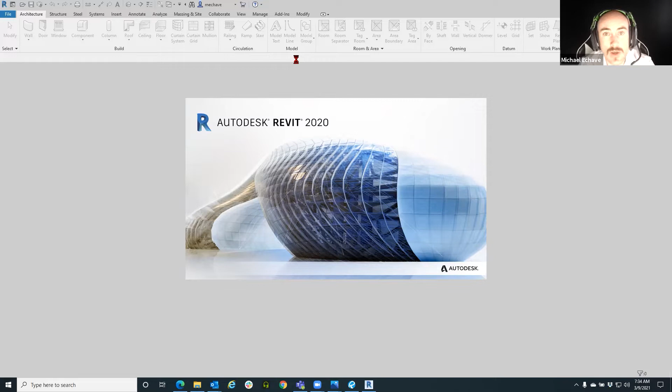Add-ins are great for batch printing. You also have the ability, for those of us in the architectural realm that use rooms, to export your rooms out as spaces, which helps with punch list walkthroughs so you can itemize punch lists through specific spaces. And also you have the ability to create a 3D PDF. I'll show you that in a second.

Let's see what else we have. Looks like we have a question, and I don't know if it just got cut off. It says, I have a question about Vu. Maybe they're going to come back with the rest of that question.

Morning, having issues creating 3D PDFs from Revit, the pipe fitting valves disappear. Is there a setting that I need to adjust?

That is a great question, I would defer that over to our support. I don't know why there would be an issue of disappearing elements unless you're not having them also selected in the 3D model tree. So for those of us that have never seen a 3D PDF, this is something you can create if you have Bluebeam Revu CAD or eXtreme, which allows you to have the plugin capabilities to your software. For instance, Revit is a design software that has the plugin capabilities, and you can create a 3D PDF from that.

So let me open up a 3D PDF for those of us that have never seen one before. I'll go to my documents here, and I have a 3D PDF here. It's going to take a second to load, because it's pulling all of the information from the Revit model as well. As it loads - for those of us who also have a question like, does this work on your iPad - unfortunately, 3D PDFs do not, but it does work if you're using something Windows-based. As I'm going through here, I can spin around my 3D PDF.

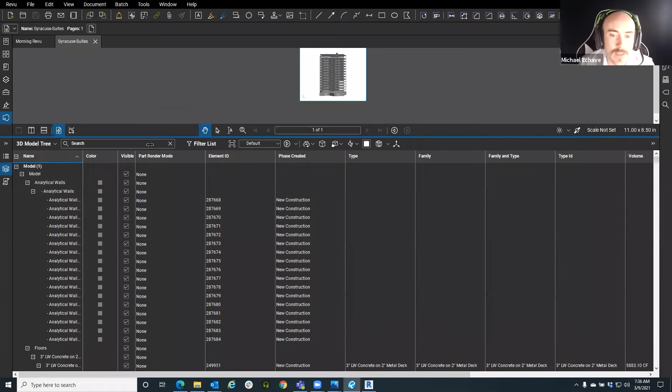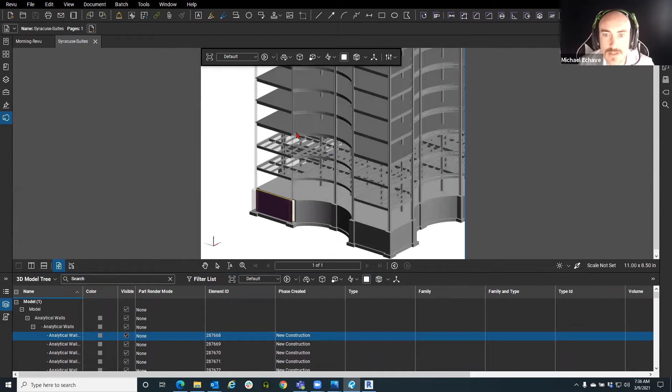You have this thing down here at the bottom where you usually have your markups list, it's called the 3D model tree. This actually pulls all of the data from your Revit model into this model column list, just like the markups list you have for all of your markups that have been placed. As you go along through here, you can start clicking on specific elements. It'll actually highlight them too in your model, so you can be notified of where it is location-wise. The great thing about this too is as you start clicking through things, it actually reads the data there and hides things so you can visually see something better, just like the floor here.

You can even have the crop section if you wanted to, just like the section box in Revit. So as you go through here, you can pull and push this so you can see the inside of it.

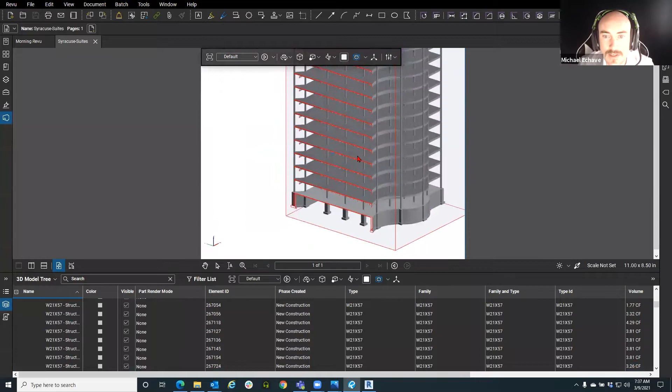Again, it is different when you're trying to navigate through it. As I'm scrolling around the model, it's not the same as Revit, so if you're transitioning between the two, be aware they're not the same orbiting functions.

Michael, I noticed that on the bottom bar, it looked like the Revit parameters. Is that exactly what it is? Correct, yep, all the information for it.

So as I scroll along to the right, I can even see the length, the volume of it, the material that it is. You can use this list and sort out columns if you didn't want that data from it.

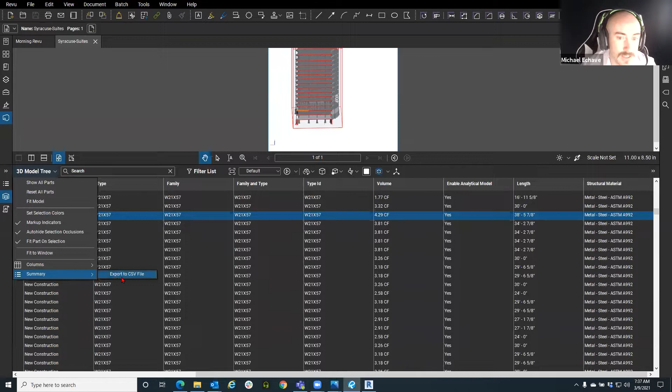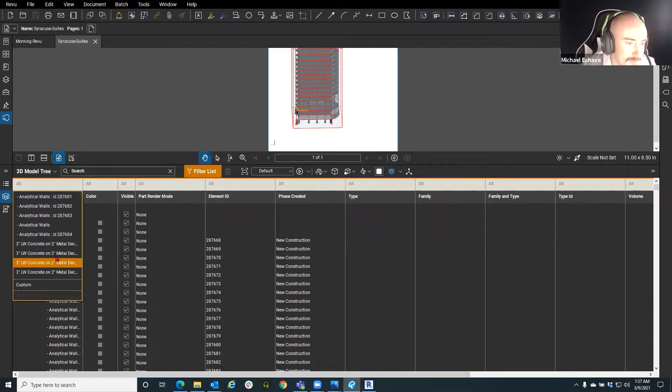You can also create a summary to a CSV file. You can filter these out saying, hey, I only want to see specific ones from - we won't do element ID - maybe we just want to see the 3-inch concrete ones.

So in typical fashion, when something's filtered out in Bluebeam Revu, even markups, everything else gets grayed out. Everything that is filtered will be its prominent color.

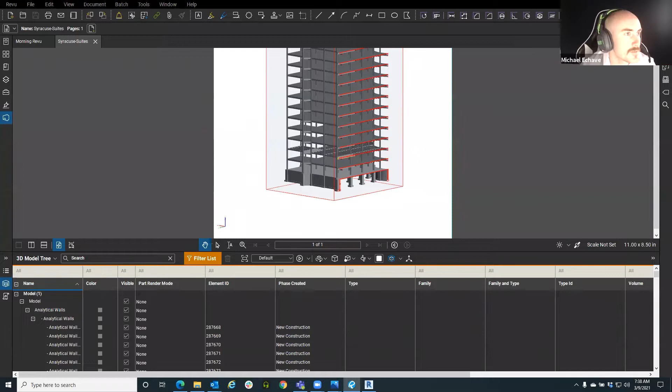Hey, we're really excited to try the studio function of Bluebeam for our enterprise, and I was wondering if there's a way to deploy Vu for non-Revu users in the enterprise right away without going through the trial, so they're not prompted to renew or purchase Revu. We can just have our tech team install Vu for them to use for meeting participation with project managers in the facilities group.

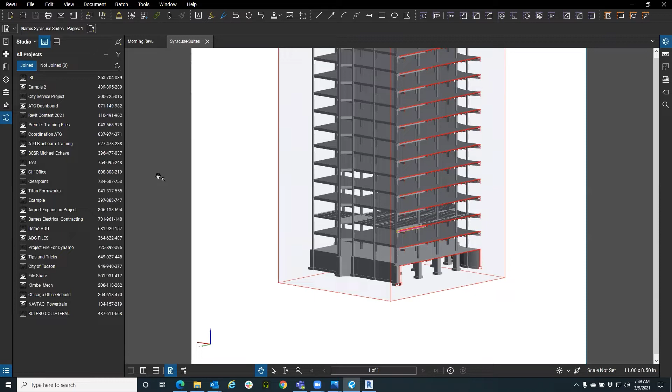Okay, so Edward, you're saying you have some licenses of Revu, you have some PMs going to use the view mode? The PMs all have Revu eXtreme, but we want to collaborate with our end users and associates in the enterprise with our drawings and everything. So it'd be nice if they had View as well to participate in the studio sessions. Okay, so they'll receive an invite if you invite them via email versus sending them the ID.

It'll prompt them to download a free trial, and after that 30 days, it turns into view mode. How do they interact? They'll still have the studio on the left-hand side that they need to gain access to, and they'll just need to log in like I just did.

So they need to create a Bluebeam ID, and then from there they can sign in. Again, right, I'm acting as if I don't have a license because I am the coordinating party.

Sure. I'm just wondering if there's a way to just skip the trial and have it install in view mode right away without prompting them to purchase a new license of Revu, because that'd just be a mess for the 5,000 associates in the company.

Yeah, let me write that down. I know there's a way to deploy an actual license of Revu as view mode only. Okay, that's what I'm curious about - if the free version does that. Yeah, I'm wondering, skip the trial and just do that. That makes sense, okay.

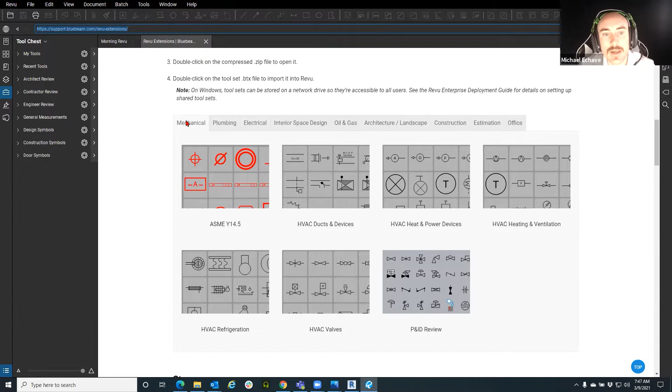So from here, you can also see my URL extension, I also put it in the chat. As you start going down, you can see there are already some created tool sets you're allowed to download for free from Bluebeam Revu's website. There's mechanical, plumbing, electrical, interior space design, and architectural is one that you mentioned. There isn't really one laid out for structural. If there's any structural specific ones you'd like us to create, we can create them for you, or again, we can help teach you how these work.

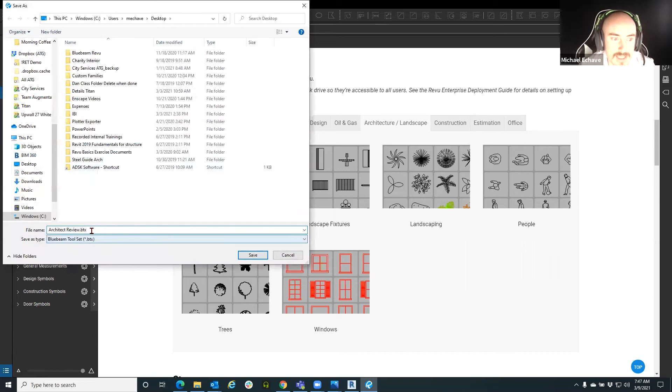For those of us that didn't know, you can export your tool sets out. Just go to the gear symbol, you can export, and they save out as .btx files. They can be shared with you, you can email them. All you have to do is double click them and they populate into your tool chest.

And if not, then you have to go to your drop down, manage tools, and import them from here. Be aware, profiles play an important role in what tool sets display from your tool chest.

For those of us that didn't know, Bluebeam Revu works off a thing called profile. That's what controls your user interface. I talked a little bit about it last time, but if you go up to Revu at the top here, go to Profiles, and these are your profiles from out of the box - actually these top three. This controls the way the UI looks, where your tool menu and toolbars are, your panel access, and it also plays into effect with your custom columns in your markups list, and also what's displaying here for your tool sets.

Looks like Kyle Davis has jumped in and started answering some of these via text. That's more the tech support stuff.

We have another question here, which is kind of related to what you were just talking about, Michael. We have been developing our own tool sets, but want to have a single location to share these tool sets on the network. Is this possible, and how?

Yes, so you're just going to change everyone's default. Manage tool sets from here, you can import them.

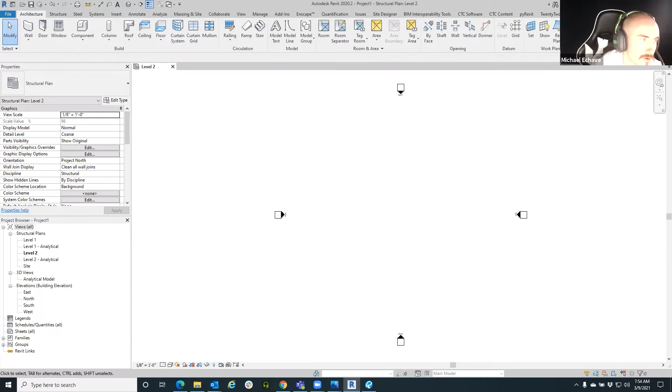David, are you going to be here next week? If you want to shoot that in the chat, because we'll talk about it next week. You aim to be, okay. I'll have the answer for you next week, and if you're not there, I'll email you.

All right, thanks Michael, thank you Matt. I think we have reached the end. Any more questions? These are good questions.

Otherwise, we started at the very beginning with sessions. Would now be a good time to give a high-level overview of sessions? Yeah, we'll start with sessions again.

Again, Studio is free with any version of Revu - that'd be Standard, CAD, or Extreme - and it's on your panel access bar. For those of us in the Legacy, which would be 17 and below, I don't recall exactly where it is.

But in order for you to log into Studio, you have to have a Bluebeam ID, so you're going to create one. I always recommend picking something for your name. As you go through here, sign in, you'll click on the little studio. And if you don't see it on your panel access because you're in a different profile or maybe you've hidden it, you can always right click on a panel area and say show, and then you'll see studio. For all of us that love hotkeys, you can just hit Alt+C.

Again, when you go into here, you're going to sign in. If you haven't created a Bluebeam ID, you need to create one. I always recommend, again, Bluebeam display name professional, because when you print out reports from a studio session, you will see the display name next to whatever the comment or markup that was listed. This also falls under the markups list as well. So then from there, you're going to sign in.

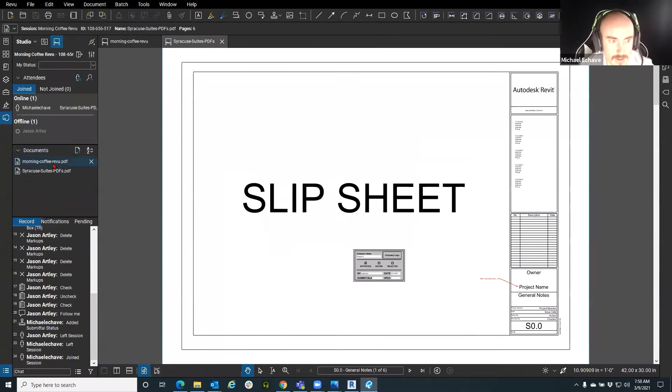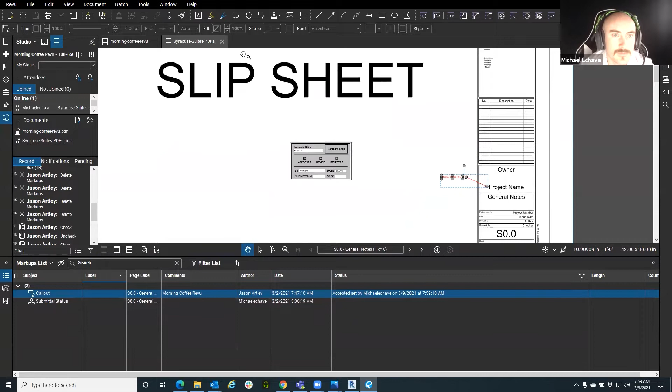So when I'm in here and I wanted to change a status in a session, let's just go to this one. I don't think anyone made... yeah, so someone made a comment here, I believe Jason did. But you always have the ability to go into here, and my statuses aren't showing. I could go in and say, hey, here's this callout, right? But I accepted it, and there we go. It changes the status for it. Okay, great. Does dashboard hyperlinks work with Bluebeam Studio Project?

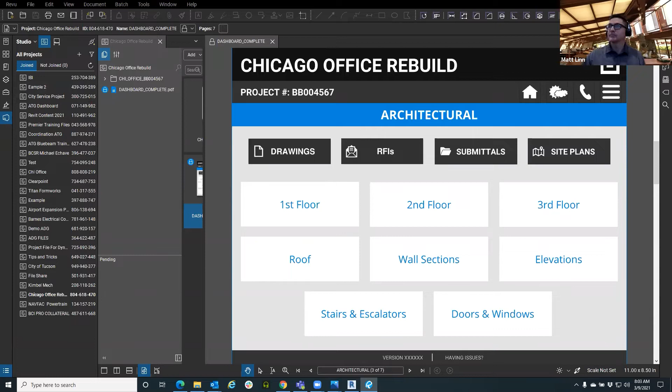Versus, Chad, did you want us to unmute you, Chad? Maybe have a quick conversation to get that cleared up? Yeah, that would be great. Okay, Chad, can you do that, Michael? Yeah, Chad—let's see, okay, can't say his last name. There you go, Chad, how about now? There, yep, we hear you.

I understand how the dashboard works for the most part, if it's saved on my file or on a server, but I kept them all in Google Drive. If I was going to open it on my own Bluebeam, I could make the links work. But for everyone else where the files live in Google Drive, when you open up a PDF it opens in their free viewer in a web tab. Everything works for hyperlinks, but not when you use the button edit action function.

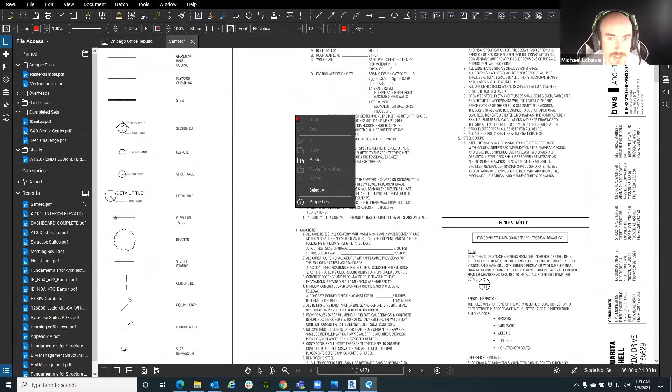If I use the button function, nothing works when it opens up in the free viewer online, but if I use the hyperlink function, it works. Because what you're doing when you're creating it—you're creating your text or whatever it is that's going to be your clickable action. I made an actual button with the Forms tab, opened the Properties tab, went to the bottom where the add action is, and made them all work. Everything works fine—it is a hyperlink, yes, but I had to not use that in the Forms tab of Properties. I had to actually use the hyperlink function.

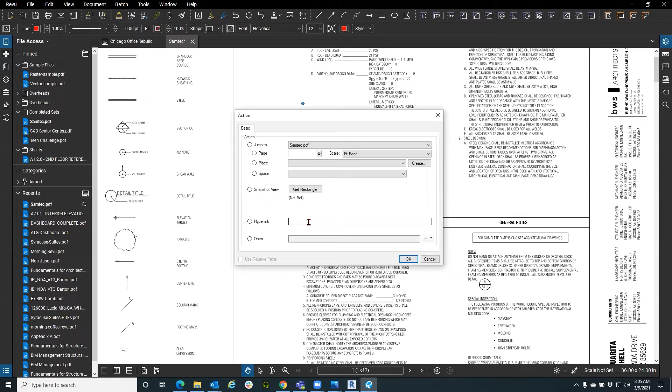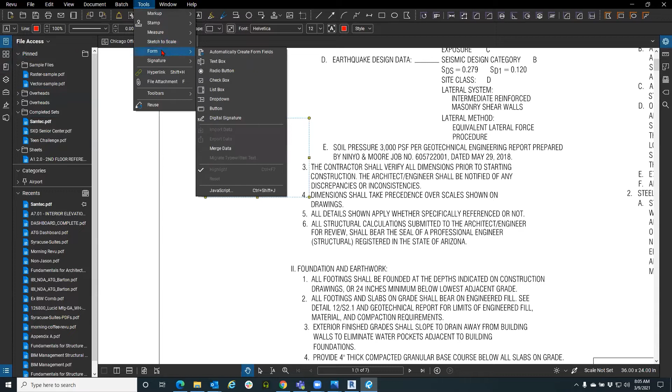Yes, and that is the only function you would use to get a link like a URL, correct? But that doesn't work in Form. Then you can't make the buttons work—you have to actually overlay a hyperlink over the button. So after you've created your button, to make it clickable like an index finger, you have to flatten the markup. And I did that as well. Okay, and I made sure the buttons weren't flattening. No matter what I did, buttons wouldn't work after you opened it up where you saved it online. Because you're creating this button, right—and now if you open your Properties tab, I use the edit action from there.

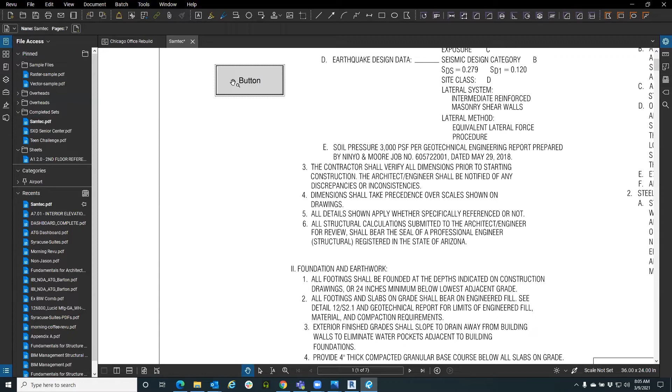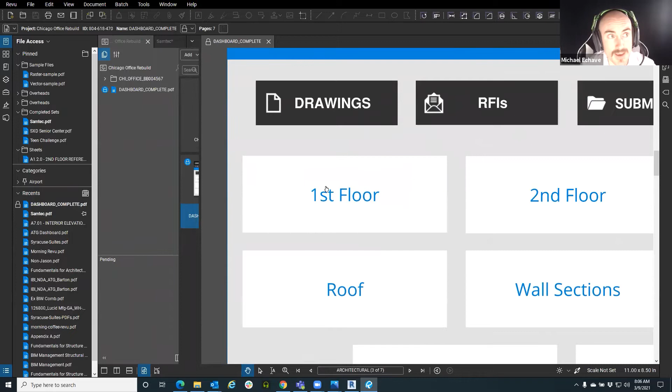The button is really only recommended when you're using some kind of JavaScripting, like a dropdown. The recommended way is creating text over it—so this is just a text markup, and that is the action, and then when it's flattened you get the index finger cursor. The only time you want to use a button is for something like a dropdown, because then you can code it with JavaScripting for how the dropdown would work. Okay, yep, all right, thank you. You're welcome, thank you, Chad.

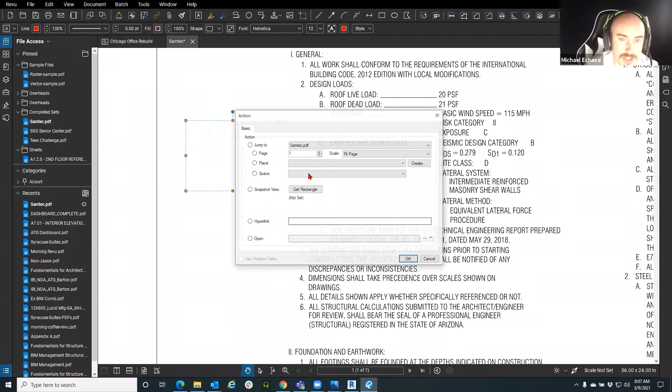When I edit my action—this is detailed again in the dashboard creation white paper—when it says open, and you're getting ready to... hold on one second here. Preferences, there we go.

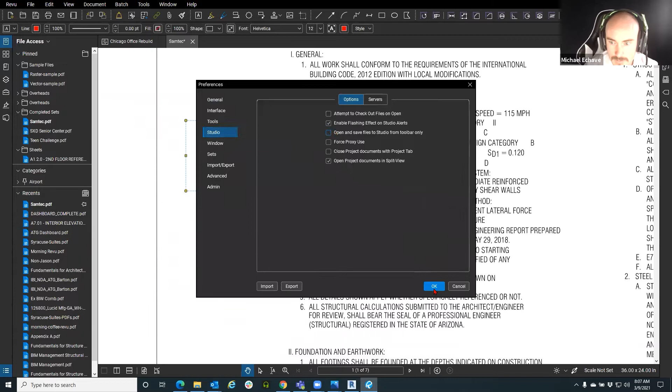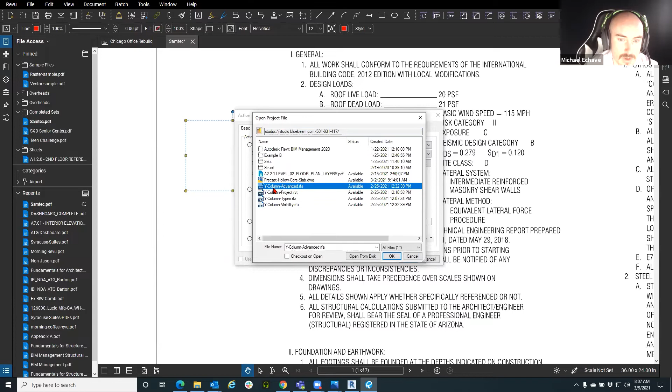You'll have the ability to go and locate your studio project that it's in. If you have any of your projects, you need to locate the file, and then you can click on whatever it's supposed to open to. It's better not to open the file directly—you should default to opening a folder, because if those files change, namings change or something updates, the link may be broken. That way the person can select the file that it's supposed to be opening.

Next question: does sessions and projects have a special data security certification? Would HIPAA for healthcare and other sensitive data sets be safe on Bluebeam servers?

I do not know the security behind what the servers are based on. We could definitely provide you what Bluebeam has on their website for what they're using for their certification on their servers.

Let's see. Studio. Is there any other questions as I go through this, Matt? Okay, no, it looks like we're all caught up.

So Michael, what are some of your favorite things? I always like the punch list. When I was going through making my own punch list, I always thought that was really cool—I could go through and make little marks with their own little buttons, and it could automatically create the actual list. You want to show a quick example of how you could do a quick punch list?

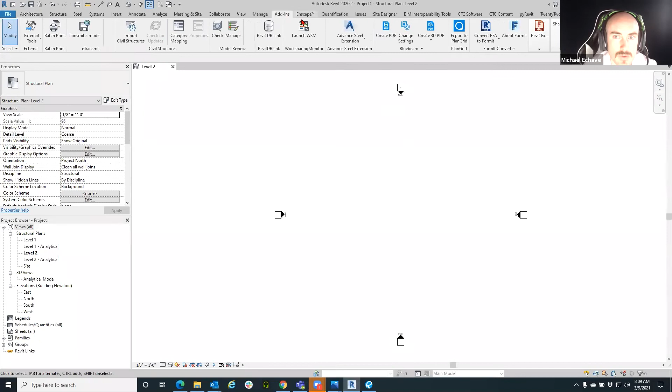Yeah, and I'll actually do a secondary one. So as we were talking about doing the add-in, what's the great part about the add-ins—why would I use this add-in versus going to file print? There's some settings you have the ability to go through and create. So when you create or export, you can export rooms as spaces. Now this is great for punch walkthroughs if you're trying to figure out on a room by room basis what your issues are. This could also help out for a quantity takeoff list.

How many items are in this room? Let's say for instance electrical—how many outlets are in this room, and what type of outlets, if you're creating your punch list walkthrough markups accordingly. So again, you can go through here in your settings and say export rooms to spaces. This is also where you create your 3D PDF as well.

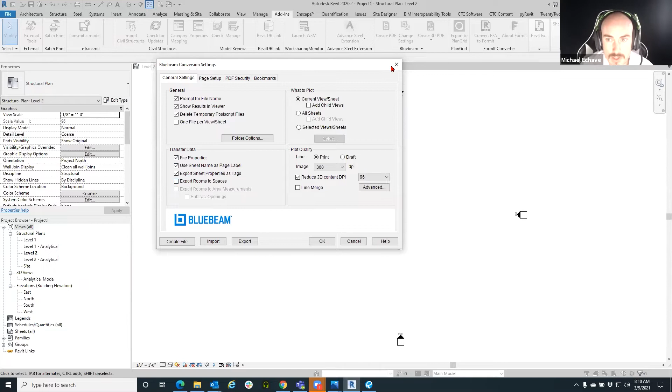Let's go in and open up a drawing that has spaces already in it. So Michael, what's the benefit of spaces over just leaving it as rooms? Well, rooms will just—if you export it out, that data won't come with it.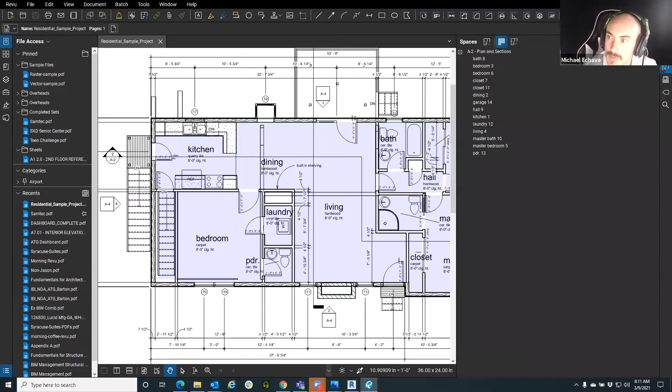So if I were to just export this out without any of the rooms in it, I would have to go in and create my own spaces, which isn't hard in and of itself, but you've already taken the time to do it—why redo it? So here's spaces, and these are all of the spaces that exported out with it. Yes, I know it doesn't come color coordinated, but you can right click and change the properties for whatever color you want, and start making it look a little bit more digestible.

But what happens is—if I could interject real quick, because 'spaces' is a Revu term. Oh yeah, sorry, did that confuse you? In my mind, and some of you may have thought the same thing, I was thinking a Revit space, and that's why I was asking what the benefit would be. So it's going from a Revit room to a Bluebeam Revu space. Correct, as opposed to a Revit space.

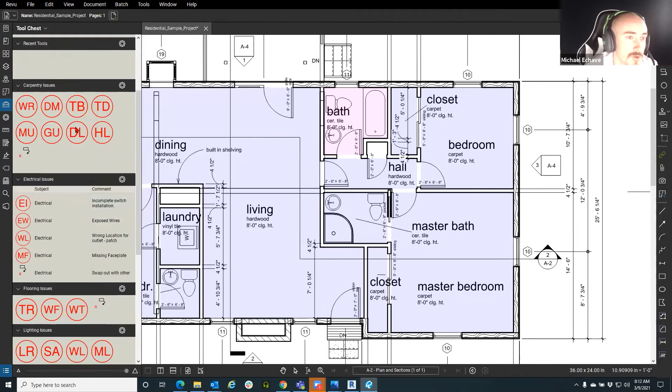Entirely different. Okay, yep. And then when you go to like quantity takeoff, which already has a bunch of markups here for items you want to go through—actually, I think it was field issues that was here—but as we go through and look at some of these items like electrical, as I start placing these in the specific space, which Matt was saying are rooms in Revit and are seen as spaces in Revu, you can start actually itemizing your data specifically to the space. So you can see what's happening in this space for those specific items as we go along.

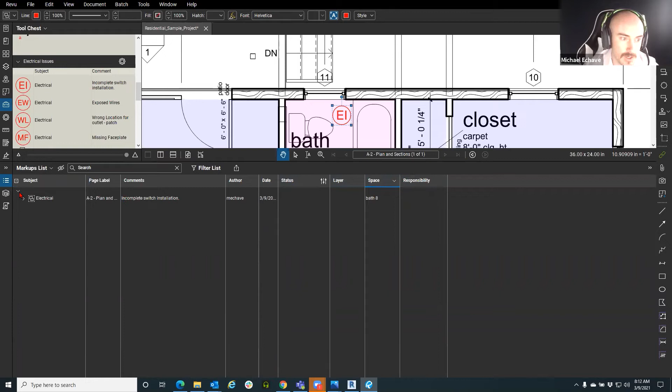Let me make a couple of ones over here, then we can organize by the space for it. Change profiles to maybe Revu Advanced, and go back down to here. Then we can itemize by space. Let me minus some of these other ones.

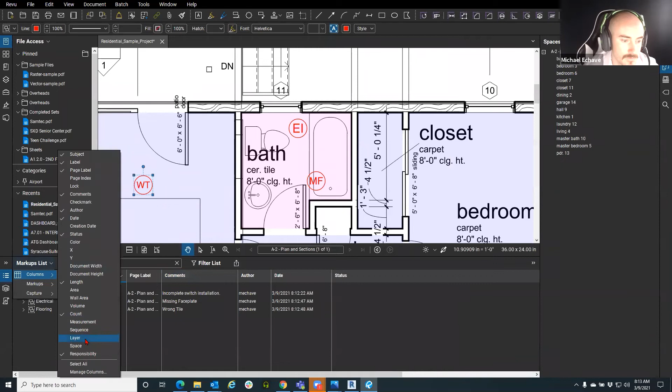Are there any questions as I go through here, Matt? No, it looks like we're all caught up here.

So then I can again click space. Okay, so bath 8 has some electrical issues. Great, these are the electrical ones. Oh, living 4 right here, right? So there's living and there's an issue in the living 4 for flooring.

And again, we can go through and rename these if you didn't like the naming for them. It defaults to the number 4. And you can also add new ones.

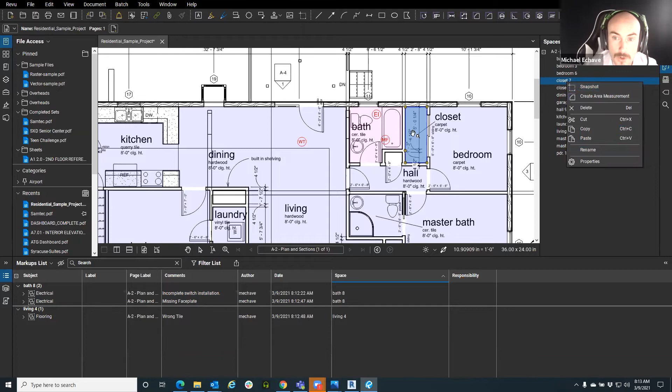You can even grab a snapshot from the room, which is now a space that's been created. So maybe you want to have a more highlighted area, and there's my snapshot, and there's my new space, right? Or let's say the laundry room, I want to get a little snapshot so I can do some markups for it. Let me paste it here.

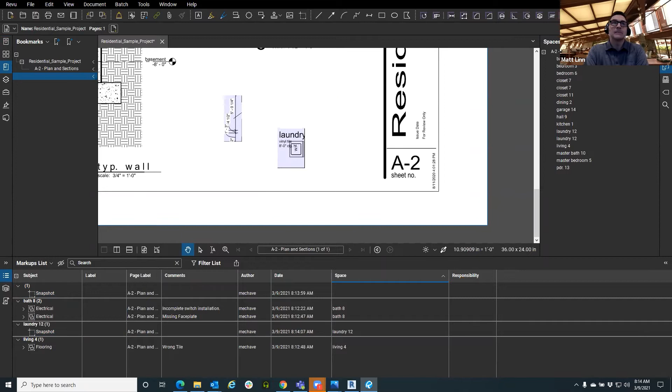And I can go in and make markups associated to that one. That's cool, it's like an isolated plan. Exactly, yep.

Okay, so how can I spit this out, Michael, to an Excel file or a PDF, or what kind of export capabilities do I have with this list now?

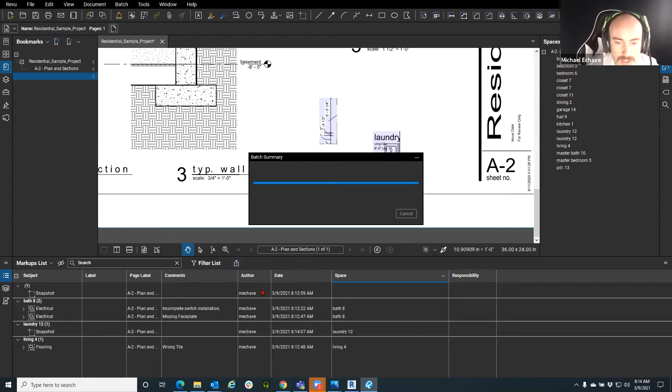Yeah, so you have some export capabilities of going through and saying a summary report. Right down here in your markups list area, you have this little export. You could do a couple things. You can do a CSV, which is going to export out to Excel, or you can do a PDF summary. My favorite is the PDF summary, but I also like to append and hyperlink to the back.

So we'll go through and do this method, and you can, of course, sort out the data here. I'm already sorting by space. So whatever you have natively set up here for your markups list column organization and filters will default to here. Or you can automatically go through here and just select things, or load a configuration of how things should be exported, how things should be filtered.

But I'm just going to click OK. Just a little additional thing, this padding is how much of the outside of that markup that's been made are you going to see. So that's what the padding is down here, and I'll just hit OK.

It's going to open up, and I will go through and see what this list has. So we'll skip this first one, this one was just the snapshot. But here's bathroom, here's the EI issue, and what was that? Incomplete switch installation as my punch walkthrough.

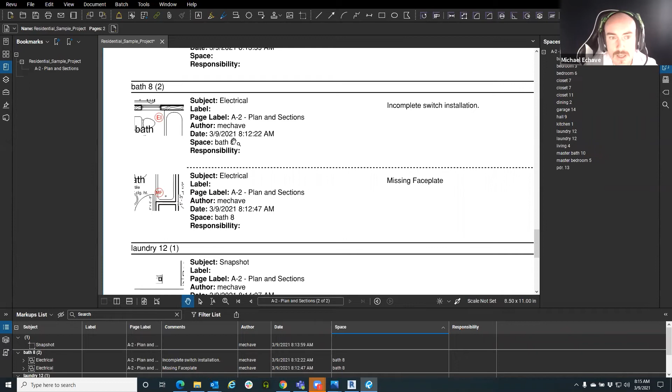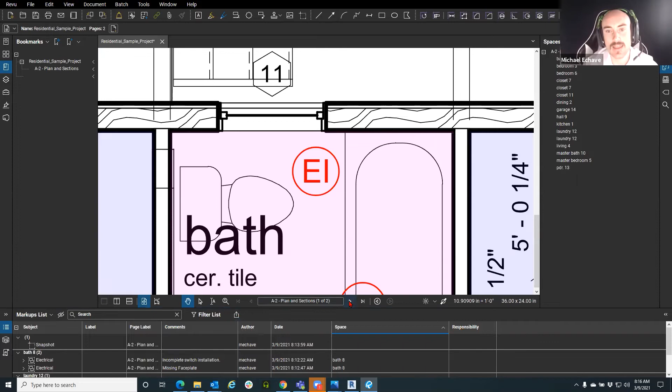The reason why I like the hyperlink feature and it appends it to the back is that when I click on this, it'll actually bring me to where it is on my document. So if I have a 100-page set that I just did this huge punch walkthrough out in the field and I placed these little markups that were a representation of my punch list, I can export them out as this PDF appended, and then I can go and look at this detailed report and simply click on it, because I don't have to search through my 100-page set on where this was. It's just going to bring me directly to where it is.

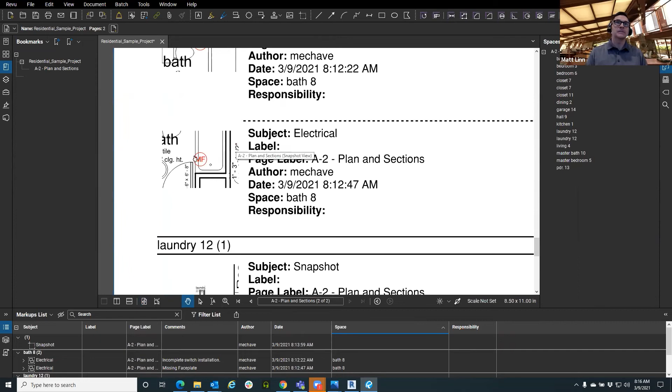That's awesome, I love the little thumbnail too in the image, because that thumbnail tells a lot. And if it's not enough, then you just click it and it'll bring you to the plan, which is really cool. Yeah, and this is the padding I was talking about, 75%. If I go to 100, it's going to add more of the background document. If I add less, it's just going to be the markup.

Any questions? No, it looks like we're still all caught up here. Great, okay, so let's go back into sessions here.

Oh, one just came in. What if it is a reoccurring punch list item, not just found in one place? So if it's a paint touch-up in 80 different places.

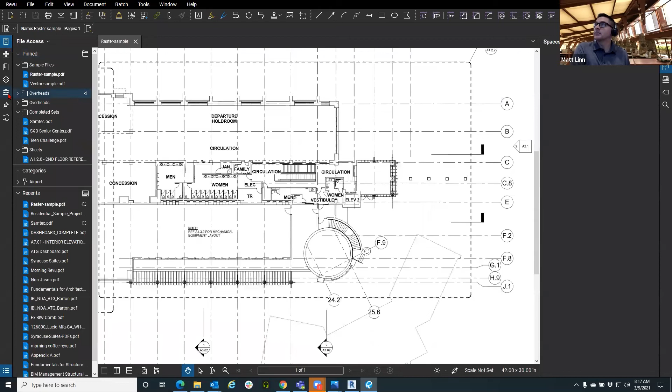I think that's how I read it. So if there's a markup in multiple areas, it just depends on how you created it. I don't know what punch list you created or what type of markup it is, but it depends on how you're sorting the data.

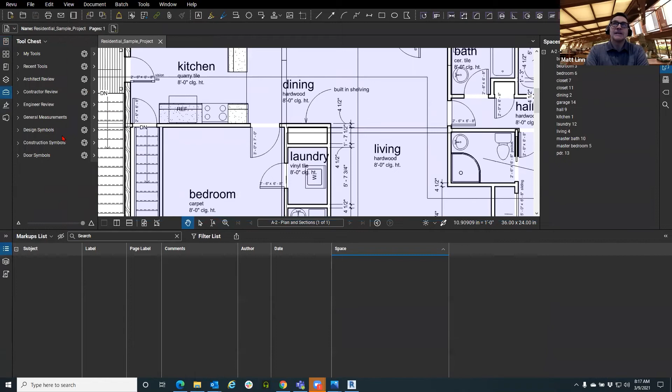So if there's multiple ones, let's go here. I think this was in this profile. So the question is, if you have a paint touch-up icon, you can place that same icon everywhere and it'll have the same notation, right? Correct. So just like this warped floor, it was used twice. But I am organizing by space, so it'll show them in the space that they were at.

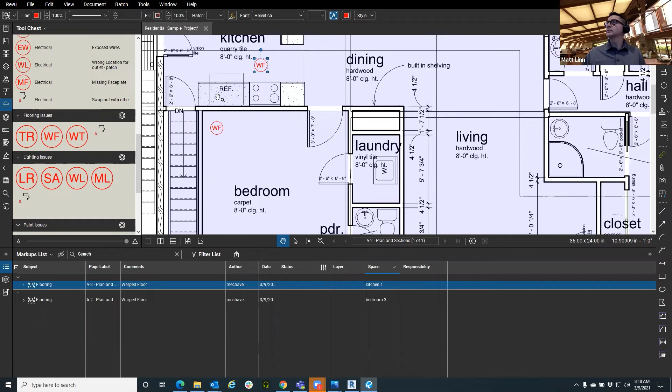Okay, so yeah. Okay, you're welcome, good, Carly. Thank you for the question.

Yes, great. Okay, one challenge I had with the report generator is when I attach images to the markup, they come in too small to be useful, especially for those we have to print hard copies. Yes, I had that same

question from a client when I was actually doing a demo. It was, hey, we imported these images or took an image on our iPad and attached it to the markup, right? So if I go through here and I'm out in the field taking pictures of an issue, I'm going to change this to my advanced profile. And I make a markup here and attach an image. Let's just do a revision cloud here.

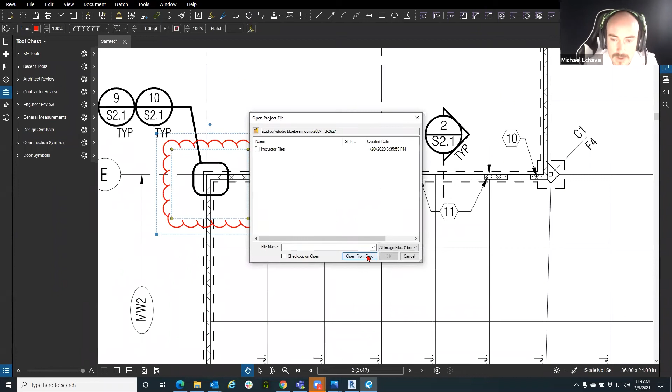Around here, and I took a picture of it. I right-clicked and said, okay, I'm going to edit, capture from file. Let me open my disk here, or you could capture it if you're on your iPad. Let me go to my pictures and we'll add this one.

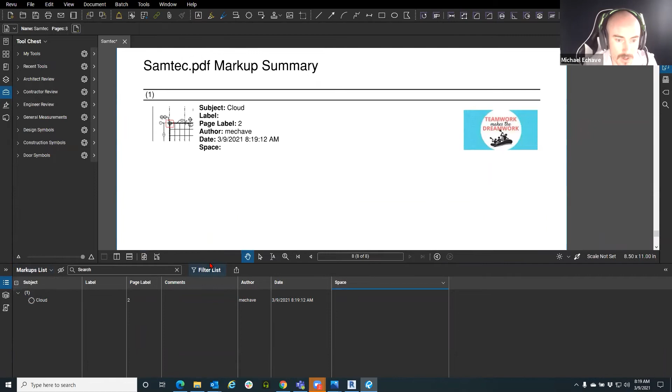What happens is when you do the export, it's just a little snippet of what it is. If I do a PDF summary report and append it, it's not that great of resolution. Now, if you want the true resolution of how this image is exported, you need to do what we call the capture export. So I go back to my front side, export that data out from markups list capture, and capture summary is where I want to get my items from.

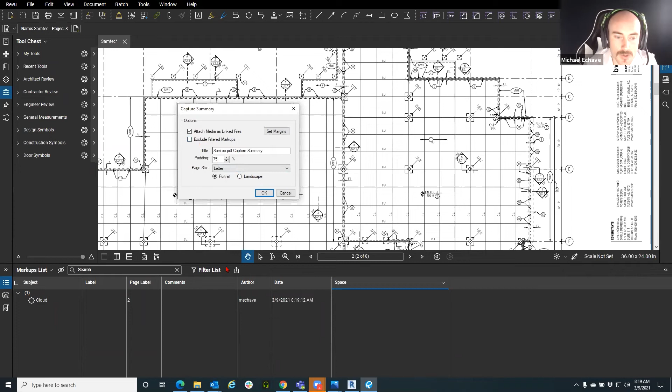And then you can attach media as a linked file, and you can set the margins if you wanted to. You can also set the padding and exclude any filtered markup. So if I wanted to filter out information, that's how I would run it. Portrait, landscape - again, you can mess with all these settings and have a good time figuring out what works best for you. But that'll show you the actual image here.

And when you click it - this isn't pixelated because of the PDF, it's pixelated because of the image itself. I probably should have just picked a different item. But as you go here, it's going to open up your default viewer for it.

Hopefully that answers your question. If it doesn't, we can add or elaborate on it a little bit.

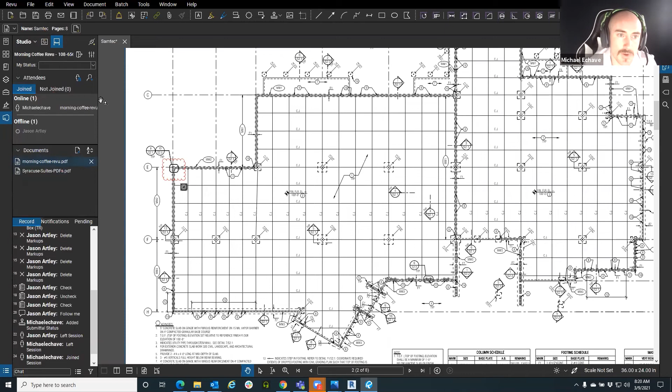Okay, looks like we're still caught up, Michael. Great. So as we go here, we were talking about projects, storing, creating a dashboard, all of that good stuff. Next would be the studio sessions, which is live collaboration on 2D or 3D PDFs. And yes, it's free with any version of Revu - that being said, CAD, Standard, or Extreme. And what this allows us to do is collaborate on 2D or 3D PDFs.

So as I go through here, I can actually mark up the PDF and collaborate with project partners simultaneously. Now, how does this work? What's over here on the left? I don't really understand it. You can tell which PDFs you're in just by looking at the PDF itself.

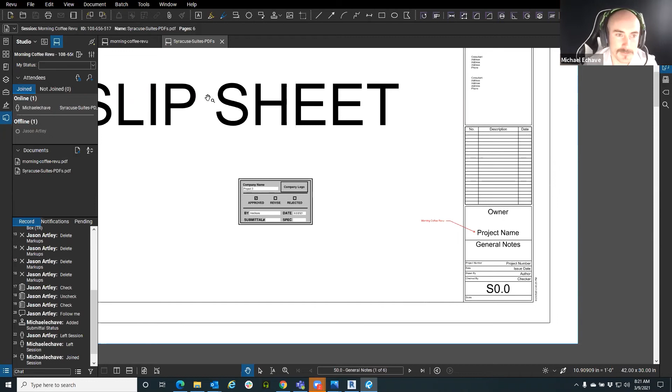And to the left of it, you'll have the little - it's like an old chalkboard. Matt, do you remember those chalkboards that used to flip and rotate? I do, I'm that old, yes. Hey, I remember them. I don't think it's more of a - because then what, it changed to the smart boards. I remember the smart boards, yeah. Yeah, it was chalk, and then it was marker, and then it was smart. Yeah, then it was the smart board. These are the old ones that weren't mounted that used to flip and rotate, so you have two sides.

But that's what I kind of reference to. And then that will show you, yes, I'm in a session - that's where this PDF lives. On the left-hand side, you have your attendees list, so you can go through here and see who the attendees are. What are your documents? And then this running record report.

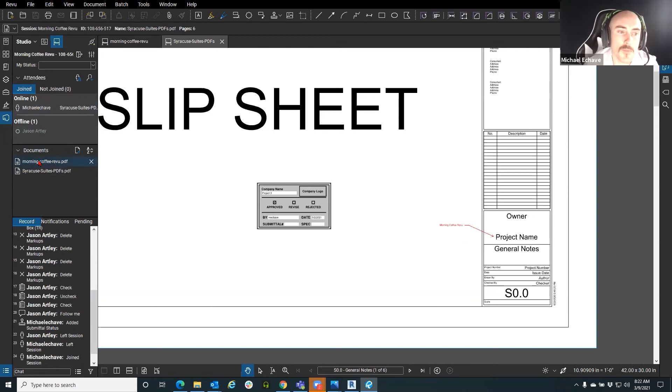And again, this is where I said you should be professional with your name, because you don't want to see Batman on the left-hand side here when you're trying to click things and you're like, who was that? Was that Matt? Matt, did you pick Batman, or are you more Marvel, right?

And this will be listed. The great thing about the running record report is you can start clicking on things and it'll show you where those were at. So as you started making those markups, it'll bring you to where it was at in the document set. You can also export this record report as well.

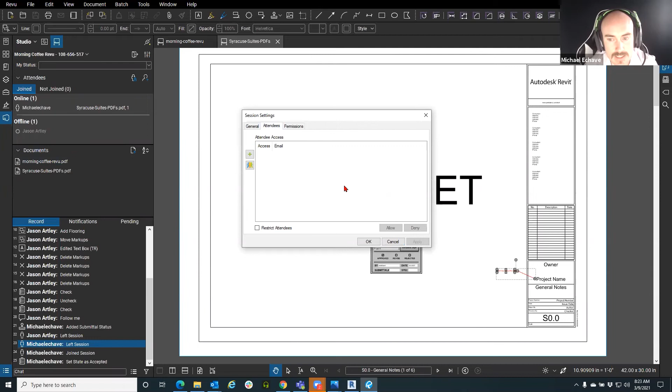You can now assign someone's original markups to a new person. The way you do that is you have to actually remove the person that was there. When you get ready to remove the person from this list, you say deny, and it will prompt you to assign that person's markups to someone else. That's how you assign someone else's markups. But you have to be the owner of the session specifically to do that.

Okay, we did have another question come in. Can you explain how to use filters in Studio?

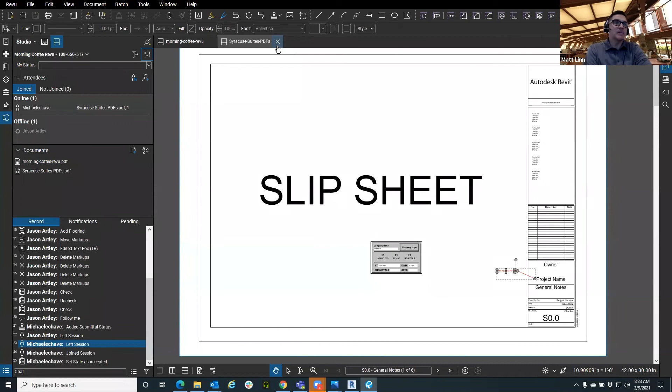Yeah, so I think it was version 19 or 20 where they updated the way you can use filters. If you're in 18, I don't know which version it was, 19 or 20, they added this multi-filter list, because it used to just be this, and then you'd have the funnels next to the columns.

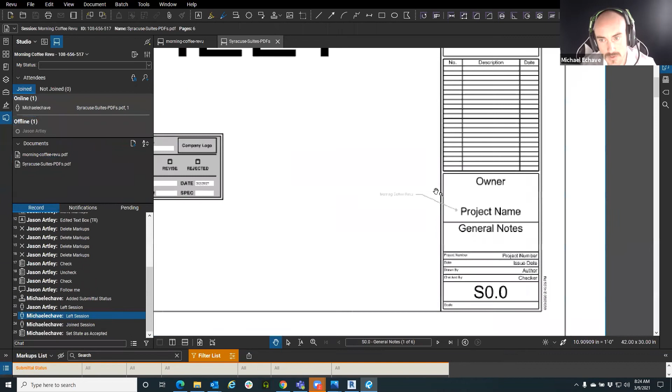Now you can use the same filtered list, and you can actually save them. As you click it, you have the ability to see saved filters. I don't have any filters, so I can go through here and say I only want to see ones that have submittal status. Then I can save this filter as something like submittals, and I can always go through and re-click it. What filters does is it doesn't hide the old markups, it actually just grays out the ones that aren't falling into the filter that you've created.

Could you show again, it went really fast, how you isolated the submittal status versus the other columns? Yes, on the filter, yep.

And again, the new addition of the filters is it can be multiple columns now. So I just click the top area up here that is orange, and I selected what from that item, which is the subject. I could filter from the call out markup or the submittal status markup, which was the stamp, or custom. I clicked submittal.

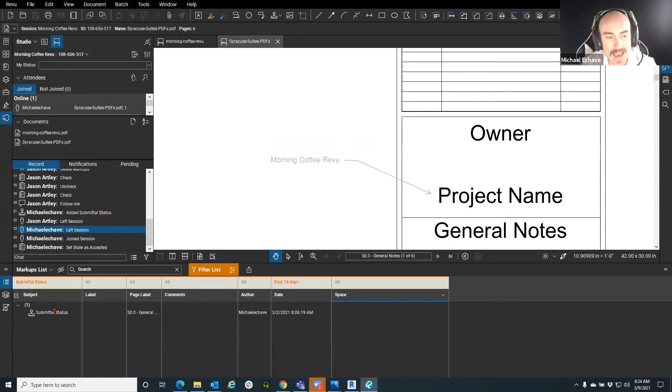And then I can go again and add more, right? Maybe it was a specific day, like the past 14 days I only want to see. It's going to add those filters here, and I can filter out my data that way. So then the top big orange button just turns them all on or off? Correct, yep.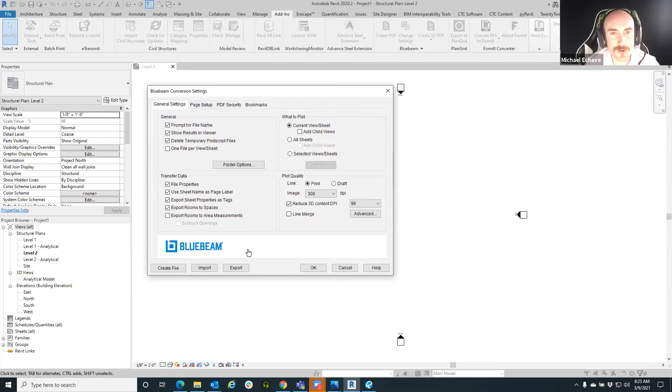You can also, and I didn't say this before, but even when you're in rooms, you can create area measurements, and this could already have the area measurement set up for your rooms as export. If you needed that data in your markups list to do an itemized count for flooring or something, who knows.

Anything else, Matt? Looks like we're all caught up. Great. Oh, nope, one just popped in. Great, thank you. Can you share the link to download the Bluebeam add-in?

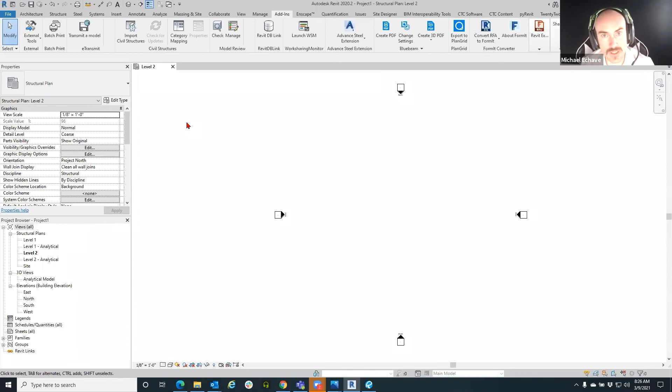It should automatically add in when you download Bluebeam Revu, and Revu CAD or eXtreme gives you the plugin capabilities. If you don't see it, you should go up here to Revu, Admin, and you should see my admin screen here. Where did it go? There it is. You guys see this, right?

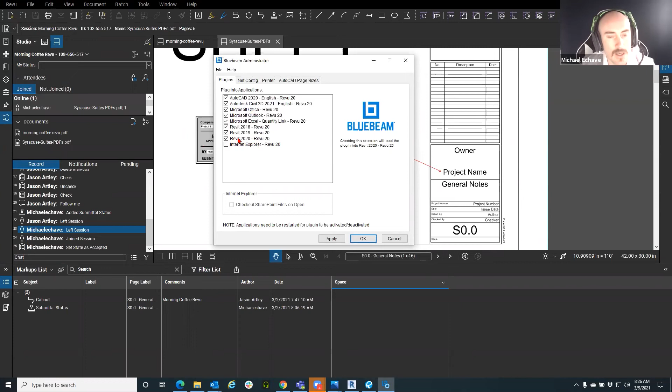Yes, we do, this floating thing. And then you'll see your add-in, right? I don't have my Revit 21 again, I have to uninstall Revit and reinstall it for 2021 for me to see it. That's why I didn't open 2021, but 2020 is here. And this will allow you to select the plugin capabilities for it.

Okay, so if it's a new version of Revit, you'll have to uninstall and reinstall Revu or Revit? Revit, if you don't see it here. Okay, yep.

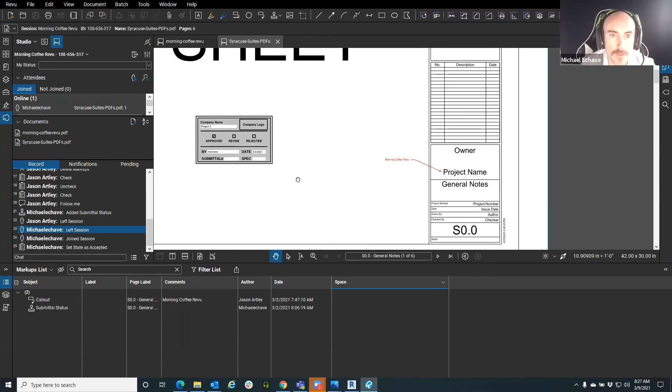Covering sessions again, going through it and talking about how it could be utilized. You could follow attendees as well, so you don't need to be in a Zoom session. Like Matt and I are collaborating on this PDF, he doesn't need to be in a Zoom session with me. You can always just right click and follow an attendee, and it'll trace around as they're going through it. Let me leave this session here. I actually have my iPad that I can use to show you all how it would work.

I'm out in the field, right? You'll see Joe demo. Not now, okay. Hopefully it lets me go. I guess there's an update for the iOS app. I'm gonna log in, you'll see Joe logging in. Joe's out in the field looking at PDFs, getting ready to make some markups. Who knows what he's doing. I guess we could chat with him and ask him.

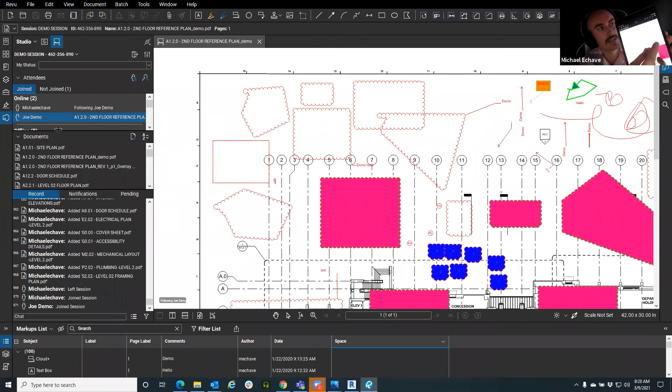He might tell us to leave him alone. But as I right click on him, I can say follow attendee. If you guys can see my iPad, as I'm scrolling in and out or zooming in and out, you're gonna look at my iPad and the screen, and it's going to follow and do the same exact thing that's happening on the iPad as he's moving around. So he's out in the field, he's gonna go make a markup up here at the top right, wherever he can find room. He's seeing something issued out in the field.

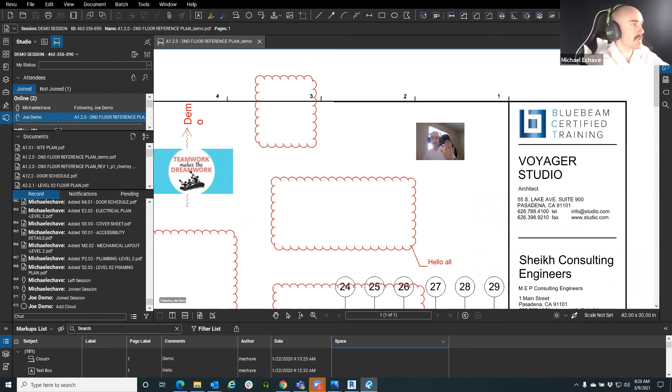He's also going to create a capture from it. We'll say, Matt, say cheese. There's the picture, and then we'll use this photo. And just like that, I've watched Joe, out in the field, create a picture from his iPad and attach it to the comment.

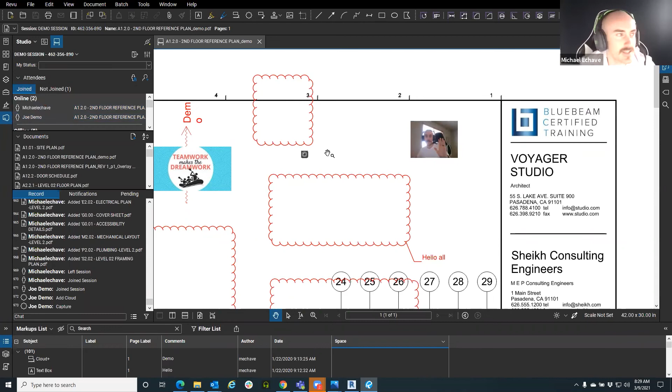What is the difference between Studio Session and Project? Studio Sessions is live collaboration on 2D and 3D PDF, and Studio Projects is like an FTP site where you can have unlimited storage for any file type.

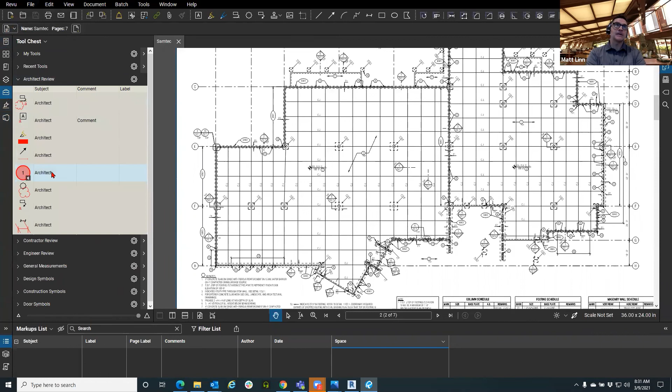In the industry, I used Bluebeam Revu as an Adobe PDF on steroids. It had the little icons that looked like a door or an electrical outlet. It was basically a method for me to review submittals, shop drawings, and that was pretty much it. Yeah, I pretty much hung out in this tab, that little toolbox is all I knew. So collaborating with Michael and Jason, I've learned that Bluebeam Revu does so much more than just a better Adobe Acrobat.

Yeah, so Revu has a lot more to offer when you start peeling back the layers and going more in depth of what it can do for you, right?

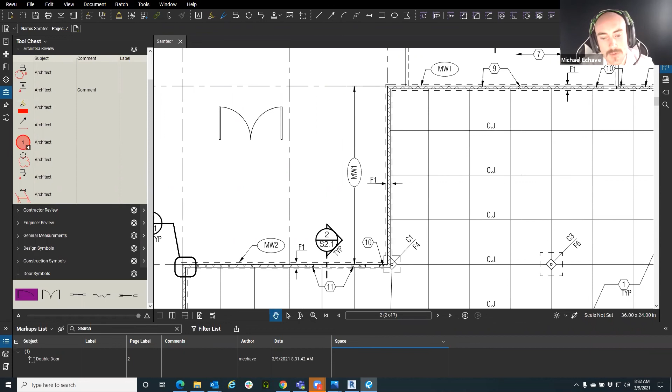Okay, Ricardo, any future Microsoft Teams collaboration with Bluebeam? I do not know the roadmap for Teams yet, but when we know, you'll be sure to see a blog posted about it, about what's happening, when we're able to announce it as well.

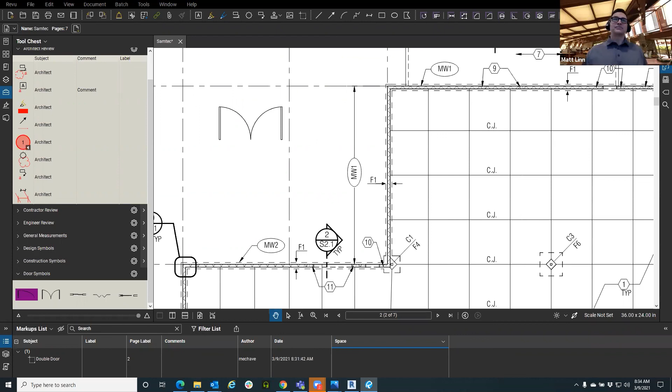No more questions. Okay, I think we finished up for today. Yeah, looks like we covered everything. Thank you, everyone, a lot of questions today. They were good. I got stumped on one of them, so it was Stump the Teacher Day today. Can't know it all, but you know most of it. Some of it.

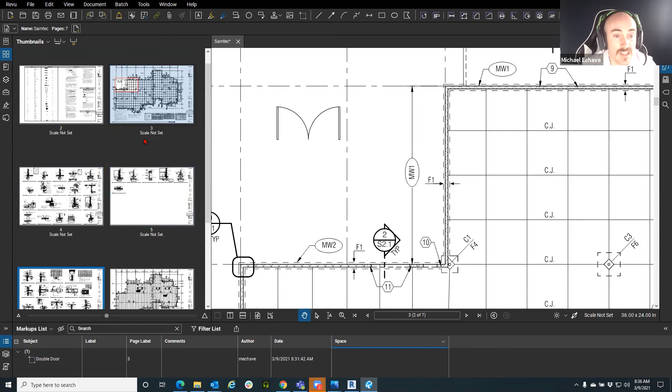So you can append old ones, slip sheet new sets, or just document navigation. A lot of people don't understand how easy it is to not change documents, but in terms of re-navigate documents, right? If I wanted to move, hey, this should be before that one, I can simply drag and drop, or insert pages from a different area. I can go here and say, let me insert pages from this file. Let me open this. Maybe I wanted this project to be in there as well. I can insert all of these pages directly into my set here, just like that.